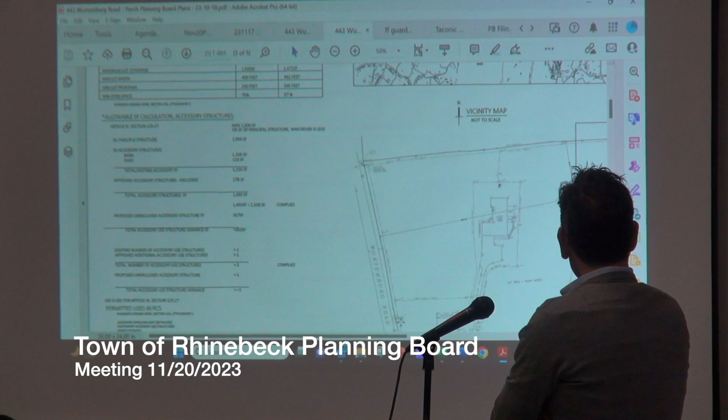Can you hear me okay? Yes. Hi, good evening. My name is Lloyd Huber. I am David Pusicuri's architect for this project. 443 Wurtemburg Road is a 3-acre parcel of land. You can see the existing house in the center, which is around 1,950 square feet. We currently have 3 accessory use structures: a barn, which is under 1,100 square feet, a shed, which is 110 square feet, and a pool house studio on the top right, which is 287 square feet.

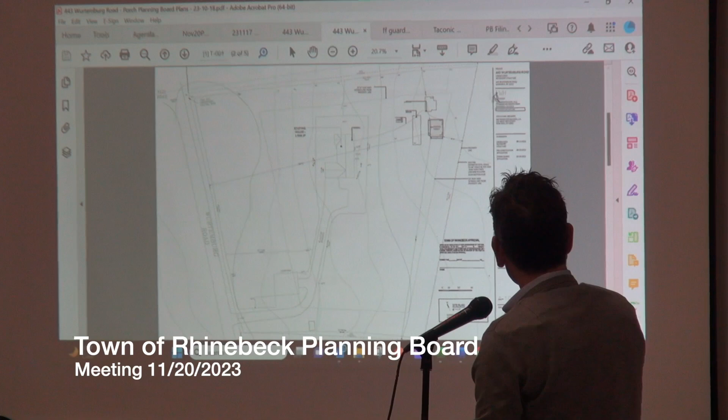We're proposing an additional unenclosed porch structure, which you can see on the right there. The dimensions of the structure are 17 by 21. Height is around 10 feet or so. If you scroll forward a few pages, you can see what it looks like in the plan. One more page. Oh, there you go. Yeah, so that's the proposed structure.

As you can see, it doesn't really have any walls. There's two columns on the west side, and a column on the east side. Those linear elements that you see are cross-laminated timber panels, which we're using to support the roof. It's essentially a completely open structure that will be sided where the walls are in Thermory Scots pine. The decking is also Thermory Scots pine. The landscape is relatively gentle, and the roof line mimics that, which you can see in the elevation.

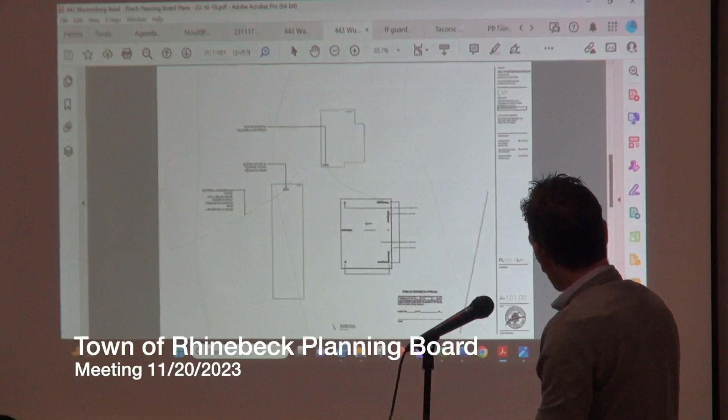Next slide, please. It sort of mimics what's happening in the landscape. So from the road, the structure is designed to essentially disappear. Because it's mostly open, we're hoping that the visibility from the street will be quite limited, and the structure will mostly disappear into the landscape. Since there are already 3 accessory use structures, we're hoping that the board grants us a special use permit for 1 additional accessory use structure.

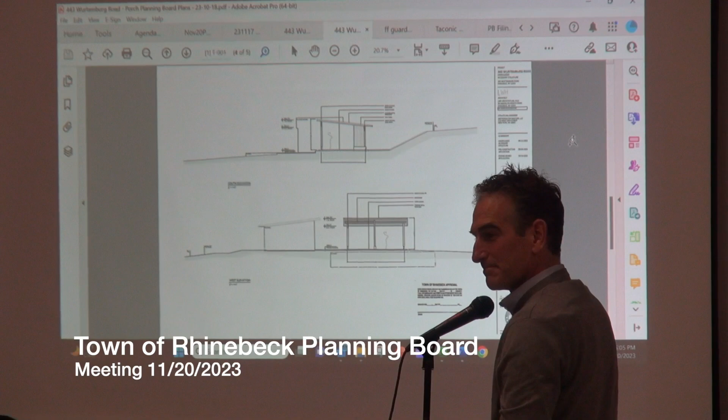So we are on Wurtemburg Road, which everyone knows is very historic, but this property itself is not a historic property. I did take a look at this, I don't have a ton of concerns. They are going to need ZBA approval for 350 square feet over the 1,500 square foot aggregate maximum you can have for accessory structures, so we'll require that approval. I didn't see any details on lighting or landscaping for this, if there's any plan. There's not going to be any.

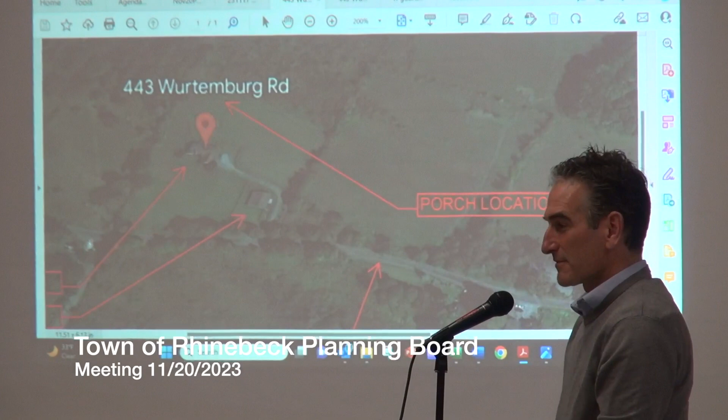Okay, and then we did receive pictures. So this is an aerial, just kind of showing the property. The house is here, the porch will be back in here. We saw some pictures in the pre-con. If you're coming down the road here where the trees are and the house and the barn, you can't really see it, it is pretty obscured. If you're over here at the intersection, you would be able to see the structure kind of toward the back of the house, but it is pretty far back.

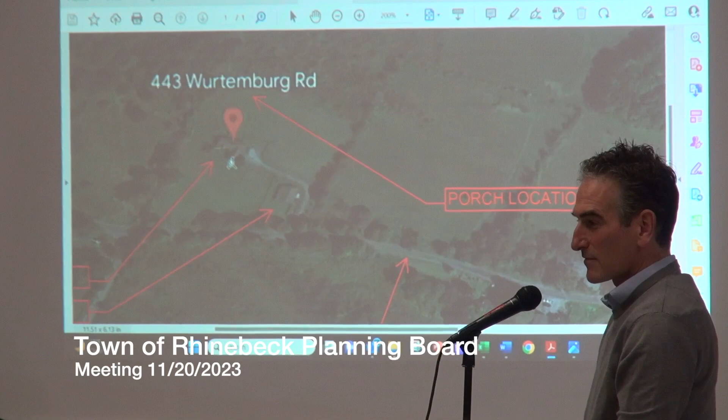And slightly visible. We had asked for some additional pictures from this location, just to see what it would be like if it was rendered. I don't think we saw those, but again, it is pretty far back from the road. So I don't really have any issues other than the ZBA and potential visibility issues, if anyone else has.

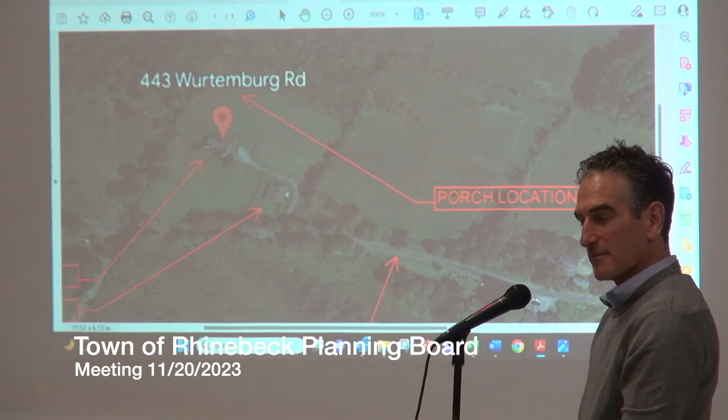Is it scheduled for the ZBA? Yes, but that has become a little bit of an issue because the determination letter expired with the application. So we're working with Brian to get a new letter, and this might change slightly depending on what happens.

So how does that affect the possibility of a public hearing on December 18th? I think it would be fine. The changes would have to be minimal.

So they would just submit, but it's not likely to go through the ZBA. It won't be. But if you wanted, you could schedule a public hearing and then continue it, or schedule it two months out and then continue it if you need to.

Do we know what the December 18th meeting agenda looks like? No, but it looks like it's going to have everything from tonight on it. Do you have any thoughts or details on what's going on in terms of potential changes or how you're going to file? Because I think that will play a little bit into this discussion.

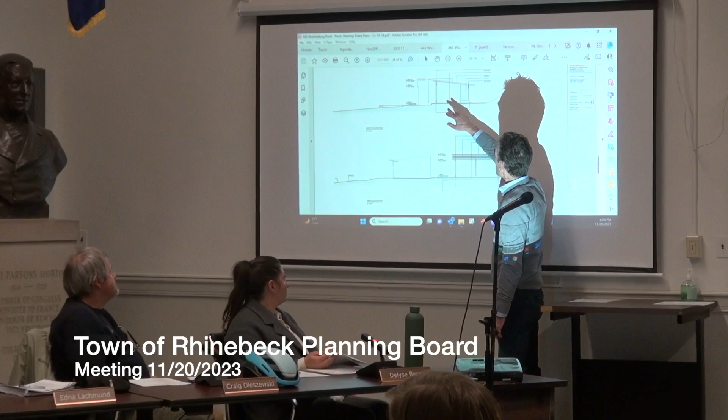Sure, if you want to go back to the elevations, I can walk you through it. Maybe hold there. So this is the west... I have a laser pointer for it. Oh, that's amazing, I was thinking about creating one. It's the second button there, it's a little right there.

So, thank you. So this is the west elevation. What we're proposing to do, as I mentioned, is designed as a classic local shed. That's why you've got the pitched roof, that's why it's mostly open. It's really meant to be part of the landscape. We know that the road is historic and the overall elements are meant to fit within the environment.

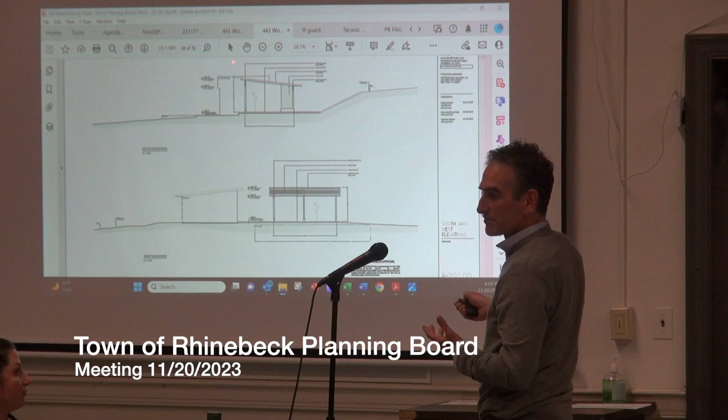This surface here is the Thermy Scots pine, a treated wood that weathers to gray, which should match a lot of the character in the neighborhood. This area here we're thinking about, and this is what I've already submitted to the ZBA for review, having be basically a screen, a planted screen. It'd be a wood lattice type structure that we can put some local vegetation onto, a privacy type screen. It wouldn't really change the geometry of the architecture too much, it would essentially help it blend a little more, but it would be an architectural change that seems like it would be required.

Then the other section, if you go to the next slide... sorry, that's okay. Yeah, so this is the back elevation. Here we're proposing a similar setup towards the other property that the client also owns. Here too, we're proposing a lattice privacy shade screen that's going to be built out of the same Thermy Scots pine.

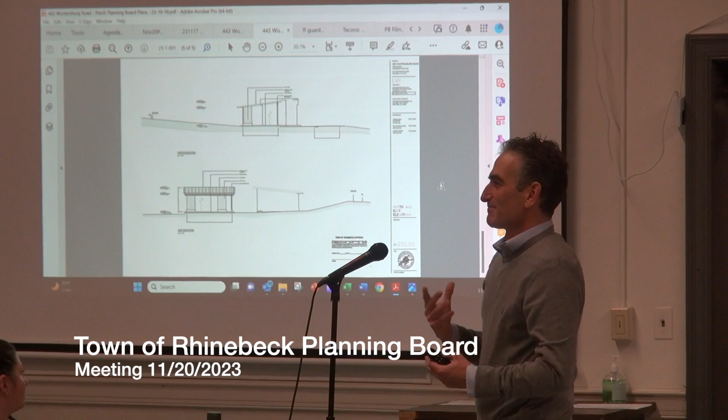And then the one additional change we're proposing is a wood trellis, which will be back here. That's a 3 foot by 13 foot wood trellis, which is basically just a shading device. So slight cosmetic tweaks, but nothing substantially really changed.

So you wouldn't be changing the general design of this, you won't be changing the 350 square foot request from the ZBA? Well, you might be also. Yeah, but substantially this is what it is, you're going to make some tweaks to it, and possibly some additions. It's not moving it anywhere on the site. I think we can see it's changing slightly.

Before we set the date, do the planning board members have questions? What is the planned use? Take it, what is the planned use? There's a pool in the front here. Yeah, right there, it's a pool, and so it's just a porch. So they're going to have, you know, a lounge chair.

Probably some yoga up there from time to time, sit and enjoy the views. There's some slope to the property, so they have pretty beautiful views towards the west.

It's just a porch, but we have cover for sun protection and rain protection. It's essentially tucked behind, right there. The lattice and the screens are part of the structure, they're not separate fences.

There'll be cross laminate timber panels here and here. So the lattice that we're proposing is here and in the back, and it's just an open lattice.

It's built out of 1x3, we'll put some plants on it, so it'll help shade the property and just blend into the landscape. It's part of the existing structures between the existing walls.

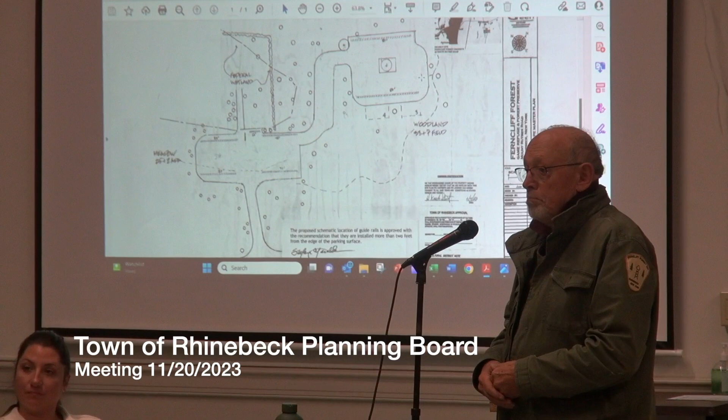All right, I'll let Jim begin with his comments. Okay, just a couple. I think when we talked before, we just asked if you had a representative image of what you thought these would look like. I did submit one, yes. Did you say—okay, maybe I just missed that. Yep, so we'll look through that again.

We had discussed putting some dimensions on the plans to show where it would be from the edge of the existing rock parking areas, so that when the inspector goes out to look, they have some type of reference point to understand where. Well, they're basically filling the whole lot—you can't go any further. You can see it's centered on each of the parking lots, and that's not to scale, but if you pace it off or measure it, what we designed is the maximum we could do.

Obviously, we want to get the maximum amount of parking spaces. I guess my question is, this is a representation of the guide rail—would it be at the end of the parking area itself? Like, is this showing the end of it? Approximately, it's a wooded area, and it's not precise like a building, it's not a wall. And where do you measure from? It could be, what, a tree? I don't know, I wouldn't know how to do that.

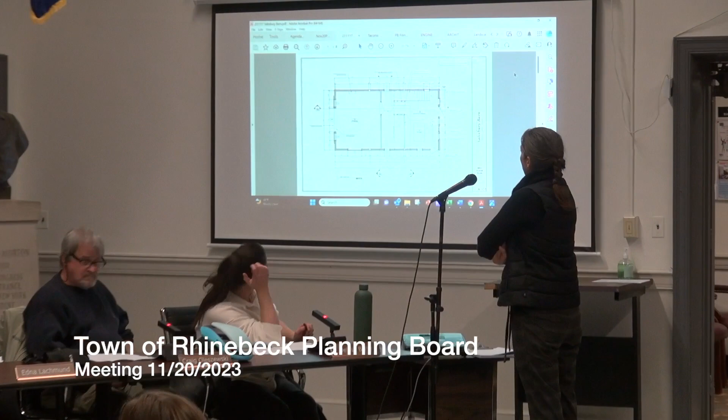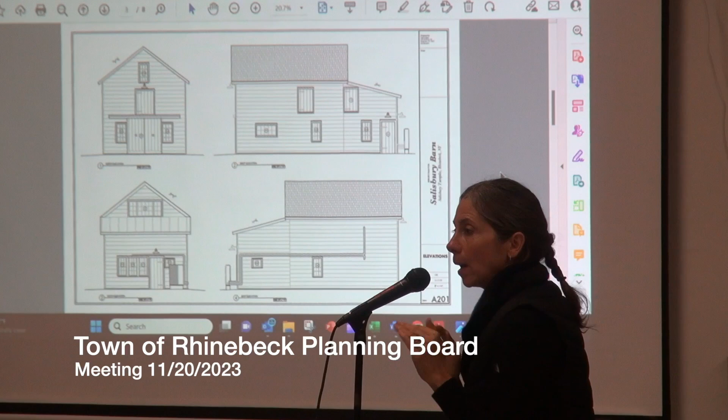So at the last meeting, I was asked to draw in the proposed new split location. Greg and Jerry came by and described everything, and the unit out there around the back. The pipes will go and will be painted the color of the barn—upstairs, downstairs, and on the back of the barn, above the windows.

That was one of the changes. The other thing we changed was we're keeping the original doors on the barn all around, so everywhere is original, except up in the storage area here, behind this shed door. If you open it, it will be a permanent window that won't open or close, because that's the light well area, so I get light downstairs.

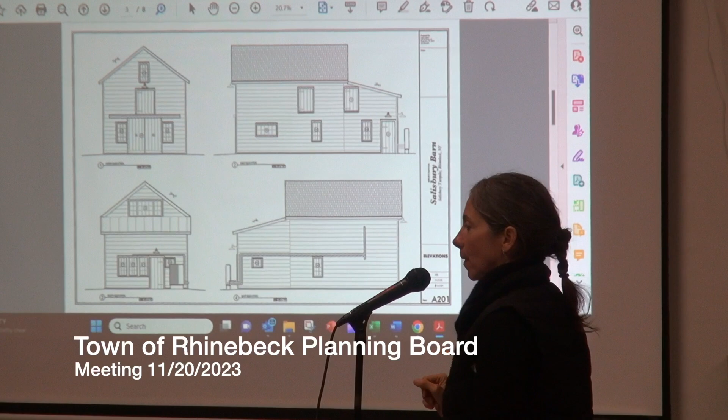The original doors here are going to be made into sliding doors. That was already on the plan, but what was behind those doors was the question. Originally I was going to do a divided light door, but that got too complicated and too expensive, so we're just going to do a garage door that looks like a carriage house door.

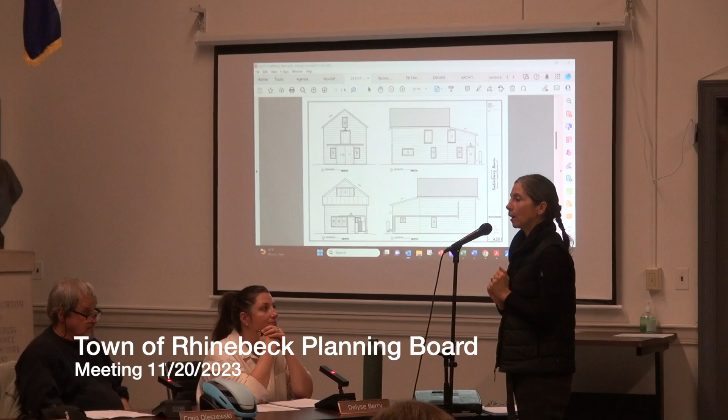And I provided a picture, I can show you. It's just wood clad. You can see it's wood clad, but it will be behind the sliding door, so that will barely ever be open.

It's only, we have to keep the mice out and keep it keyed in. I have glazes and clay that cannot freeze, and we just want to keep the mice out. We don't have an attic, basement, shed, or garage in our house, so this is our only storage for anything, and we have a big mice problem, so we just want to make sure we keep them out.

So the plans up on the screen are new as of today, showing some of the changes that have taken place. We'd asked for those at the last public meeting.

The one thing I did notice since the last public meeting is that these plan sheets aren't stamped or signed by anyone—they're just elevations. I'm not sure if that necessarily matters. This one is—that was the only thing that needed the stamp and signature. So there are some other details in here, but I just wanted to raise it now in case the building department says these need to be stamped and signed.

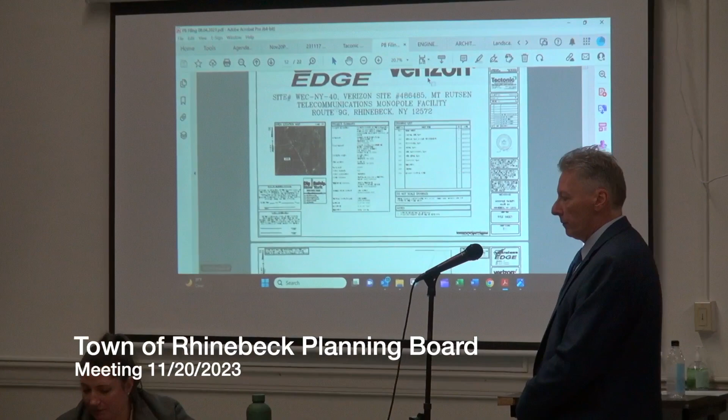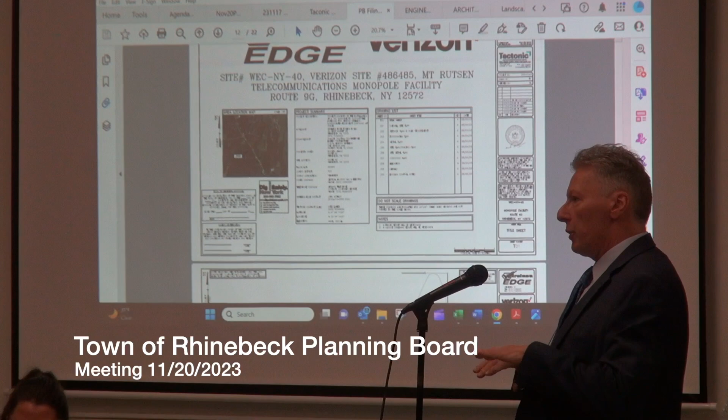So while you're pulling that up - the second location, on the same block, is closer to the Shell station, to the intersection. There's a little bit of a natural nook in the trees, so there's a lot of trees around it.

So the current site is right there, the A site, right in this building up here. If you were coming down 9G from this direction, it'd be pretty well shielded by these trees until you get really just almost past the site. The ground elevation is about 20 feet difference.

So that means if a 130-foot pole is good at the A location, a 150-foot pole would need to be comparable here. The other downside to this location is that it meets the setbacks to residences and the basic building setbacks, but it's too close to the road - it doesn't meet the 250 feet from the road, it's only about 130 feet. So that's going to require a variance for the setback. You really have to want that location versus the other one as a trade-off because of the variance.

So that's that. The other location we looked at is by Ruby's. If you go down, we have a location right in this corner. If you come into the entrance, go around coming from the main road, and then skirt around the woods right to this corner here - very far setback from the road, lots of trees around there.

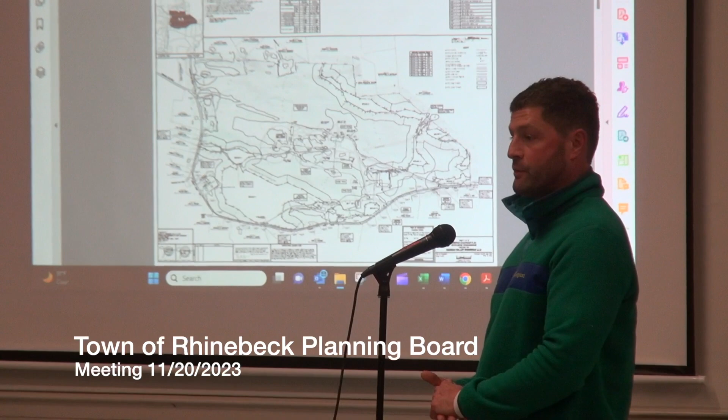So we still need that piece of information before we can really move forward with this, along with a recognition from the town engineer that the deferred approvals for the water and sewer will come from the other review agencies. I do believe that was stated in one of his last letters, so I believe that is also public information. And then if there are any comments on the EAF, Jim, and preparation of what will be a Part 3, I'd love to support you in that effort. So right now, that is all the information we have to report back to the board. We hope to continue the conversation further once we receive that formal response back.

We need to get the EAF, I appreciate that. I think the board has given me the okay to continue working on Part 2 and Part 3. We will have a long form to fill out and complete at a public hearing in the future. There's a lot of work involved in that. I do involve John Grant Lyons in the Type 1 SEQR reviews, so I am working on pulling that together. I'll continue doing so, and the updated EAF will help me with some of the numbers, just because there were some tweaks between this one and the last version. I don't think there's anything substantial, but there are some changes. So we'll use that information, and that's really all I have this time.

Questions, comments from planning board members? Public? Just some points of clarification.

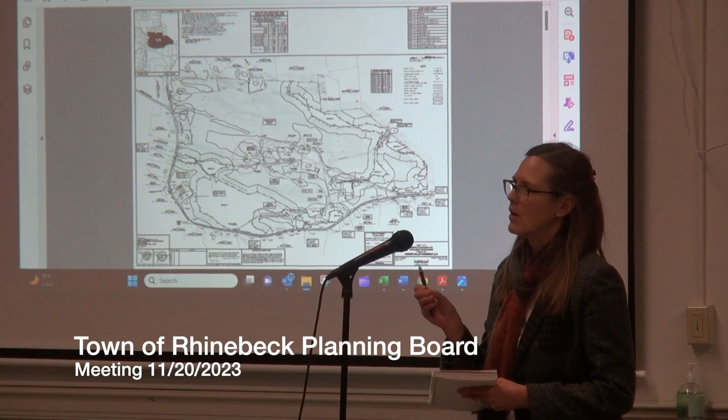That was all really helpful, so thank you for sharing that. What happens when you consider the application complete? Does that open a 30-day comment period, and then the SEQR declaration occurs? Okay, if you can just kind of walk me quickly through the steps so that we are ready. I believe the 30-day comment period has been open for years.

But not with a complete application. Well, the application was complete. The planning board accepted it as complete when they accepted this for review initially. When we do a procedural resolution, that's accepting the application as complete. Since that was accepted, the planning board has asked for a lot more information, updates, revisions, changes, and additional information. But that has been part of the continuing public hearing that started when we did the procedural resolution, which is where the board accepted the application as complete.

Can you tell me what date that was? Because that's totally not our understanding. I'd have to go back and look. No, we've been under the impression that what we were waiting for was the town to agree, the planning board to agree that all of the documentation had been submitted, and that then you could make a judgment on the final, on what had been submitted. Yeah, that's where we are.

That's what Seth is asking for, the engineers essentially sign off on the remaining comments, that they're satisfied with the information that's been submitted. I am pulling together the EAF. Yes, that information is what the board would review and determine what's going on.

So it's a continual evolution of the material as the public hearing has evolved. So it's not just the town engineer that's been reviewing and commenting, you all have been reviewing and commenting? Only in a public meeting. Okay, well, I haven't heard any comments from you guys to Rockledge, other than, is it ready yet? Any comments that we would make to Rockledge would be made in a public meeting. We would not independently.